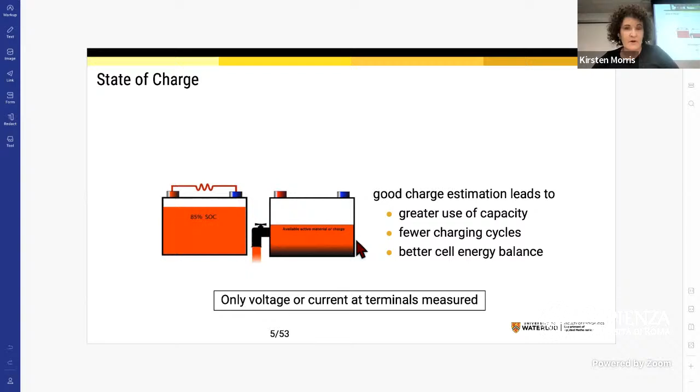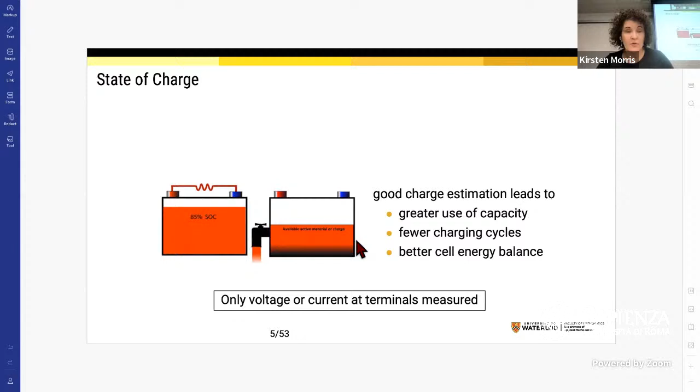There are several big challenges. One is that the models are quite complicated, and I'll show you a really standard model in a minute. And the other challenge is that from a practical point of view, all we can measure at the terminals is either the voltage or the current, and the voltage or the current is only very loosely, very weakly coupled to the actual state of charge. So it's a very challenging estimation problem for several reasons.

I'm just going to give a really brief overview. So the main variables are the electric potential and the ion concentration. And then there's a bunch of independent variables. The length along a cell, I'm just going to talk about a single cell. So the length along the cell, the location in a solid particle, which would be R, thinking of it as being spherical, and then of course time. And what it leads to is a coupled set of nonlinear partial differential equations with three independent variables. We're going to get rid of one of them.

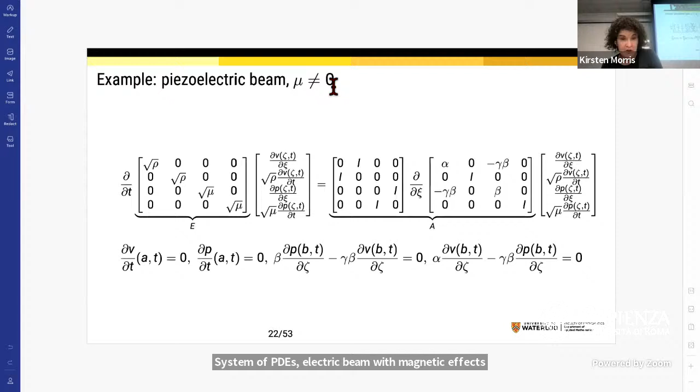So this is general. So the big extension, right, is that we've got an E operator on the left-hand side, which may or may not be bounded, and it may or may not be invertible. A couple of examples. One is, so this is not a PDAE. This is a system of PDEs, piezoelectric beam with magnetic effects. So the magnetic permeability is not 0. That's over here. So we get a system of equations.

There's an E. I mean, the E here is really not that important. It's a bunch of constants. I could have divided it out. I've got some boundary conditions. But this is fine. This is well posed. Everything works out fine. It has dynamics that don't grow with time and evolve on L2. All 4 of them are on L2.

But typically, most of these piezoelectric materials, the magnetic permeability is really, really small. So it's typically taken to 0. So this gives us what's called a quasi-static model. So one of the states becomes trivial, and I'm left with this system of 3 equations. And you can see 2 of them are basically a wave equation, okay, for V, which is the stretching of the beam. And the 3rd equation is an electrical equation for the electrical displacement. And you can see there's no time derivative on this side, so it's algebraic.

Yeah. This is actually really common, is we have a parabolic equation, some kind of diffusion type equation, maybe with some drift, coupled to an elliptic equation, and then some boundary conditions. This comes up a lot. If I took that lithium ion cell model and the electrochemical model and I linearized it, we'd end up with a system of equations that looks like that. Okay, so you have essentially kind of slow dynamics coupled to dynamics that are in equilibrium.

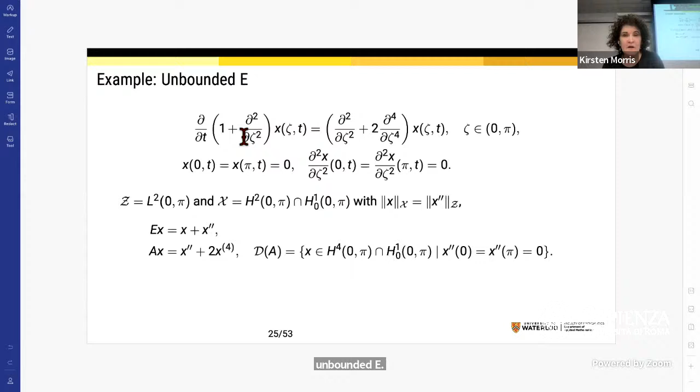And then I have an example here of an equation with an unbounded E. So you can see there's a derivative over here on the left-hand side. So this is a different example. So this wouldn't happen with DAEs, right? For DAEs, the E will be there because it's got 0 rows. You've got a non-invertible E. This kind of subtle thing only happens when you have PDEs, when you have these sort of differential operators.

So there's also some water wave models where you have an unbounded E on the left-hand side. If there was a minus here, this models soil, some kind of soil dynamics, but this actually makes it more mathematically interesting because it's no longer invertible. So I have an E that's unbounded and also with a non-trivial null space.

Okay, so back to my class of systems. So this is a class, right? So I'm restricting myself to linear systems here, but it does model a number of important situations. So the first primary questions are well-posedness, right? Do I have a solution to the equations? Is it unique? Does it depend in some sense on my initial condition? Okay, that's what it means to be well-posed.

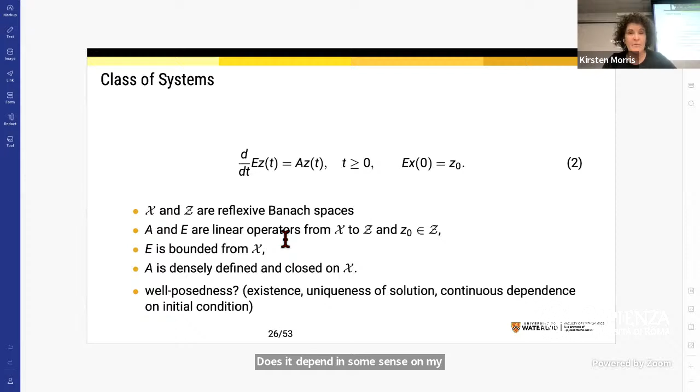So I'm going to do a little recap for a standard system. Okay, so there's an identity on the left-hand side. So z dot equals Az. So A here, this could be finite dimensions, A would be a matrix, but for PDEs, A will typically be a differential operator.

We talk about something called a strongly continuous or C0 semigroup. I typed in Hilbert space, but it could be a reflexive Banach space. A semigroup at time 0 is going to be equal to the identity. T here has got an interpretation of time, right? So at time 0, it's the identity.

It's got the semigroup property, which means if I take my state basically from time 0 to time s and then to time t, I get exactly the same answer as if I went directly from time 0 to time t plus s. So that's a semigroup property. And the third property is that it's strongly continuous: if I take S(t)z down in time with positive time, I recover z, for each z, okay?

If A generates a C0 semigroup, then A has an interpretation. It's actually the derivative of the semigroup. And the semigroup is a solution to this differential equation. If I was in finite dimensions and A was a matrix, the semigroup S is the matrix exponential. So the idea of a C0 semigroup is a direct generalization of matrix exponentials to infinite dimensional state spaces.

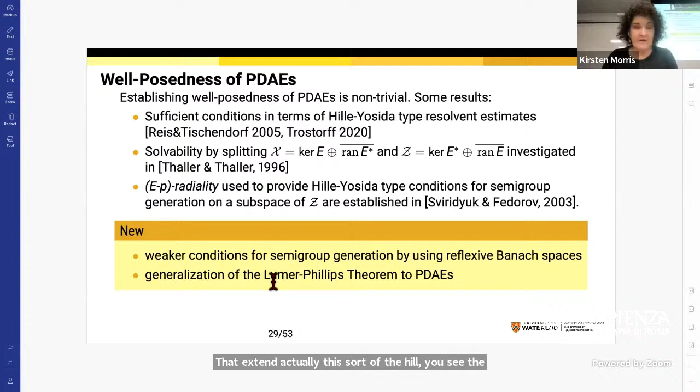So what's going on? The first part is the resolvent. My E-A resolvent is the set of all s where sE minus A has a bounded inverse. But I'm also going to define right and left E-resolvents. For the right resolvent, I multiply the resolvent on the right by E, and for the left resolvent, I multiply it on the left by E. In the original Russian book, they call this weakly radial, but I found that term confusing. So we've decided to call this the radiality index. It's a new kind of index.

So we say the system has radiality index 0 if S is in the resolvent for all positive S, and the right resolvent is bounded above by K over S, and similarly, the left resolvent is bounded above. Okay. And I'm only going to talk about radiality index 0 today, just to keep the discussion fairly simple, which for people who have worked on DAEs corresponds to roughly a differentiation index 1. Okay, we'll see this later.

But I'd like to point out that this has been extended to the resolvent in some right half plane, but also, in a more tricky way, to higher index in a paper by Mehmet Erbay and Birgit Jacob and myself that's on arXiv. Okay, so I'm only going to talk about index 0. So the big thing here is we're going to decompose the space as Thaller and Thaller did, but we're going to decompose it differently.

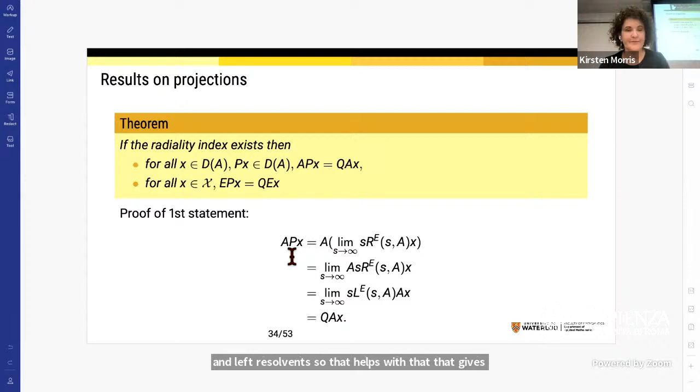So there's a sort of commuting property, and then a similar commuting property on E. EP is equal to QE. And the proof is pretty straightforward, because the projections are defined using these right and left resolvents. So that gives us the commuting. So that's the key part.

So with that splitting of the space, we define E0 to be the restriction of E to X0, similarly A0. E1 is the restriction of E to X1, similarly A1, okay? And again, because of the special way we're splitting the space, if the radiality index exists, then when we do this restriction, they're actually invariant. So A0, which is A restricted to X0, maps onto Z0, and E0 maps onto Z0, similarly E1 and X1. Not only that, the A0 part turns out to be boundedly invertible, which is going to be really helpful. Again, this is just a little bit of algebraic calculation. It follows from this commuting property.

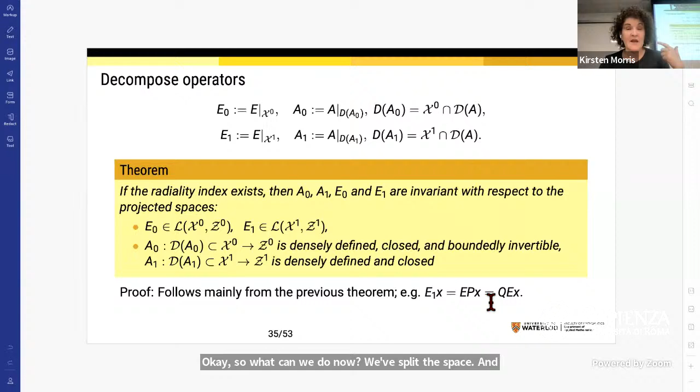Okay, so what can we do now? We've split the space, and the splitting of the space gives us a splitting of the operators, which is invariant with respect to the spaces. So it gives us what in DAEs is called a Weierstrass form. So I'm going to use the same word here. So we split the space, right? X gets split into X0 and X1, and Z gets split into Z0 and Z1 with Q. So the two together, I put tildes on them. Okay. So if the radiality index exists, and now I need another assumption: I need the range of E to be closed, which generally happens.

Then I apply these projections basically. So I apply P tilde to one side and Q tilde to the other side. And then, because of the invariance with respect to the spaces, when I write E on X0 cross X1, I get an E0 and an E1. And similarly for A, I get an A0 and an A1, okay?

Now, because I've only got radiality index 0, E0 turns out to be 0. More generally, if there was a higher index, this would be a nilpotent operator. But here it's 0. But in any case, I'm going to get E1 is invertible. So now I've rewritten the space with the decomposition. The PDAE has this really nice form.

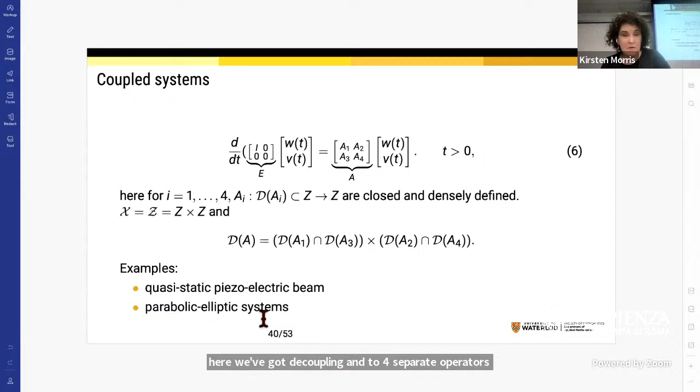Yeah, a bunch of examples that fit this. Provided that, the key thing is, I'm gonna go back here. The key assumption is that A4 here needs to be invertible, okay? If that's invertible, then everything works out really nicely.

So if A4 has a bounded inverse, and there's some nice properties with the domains, and A1 generates a semigroup, which makes sense because that's the dynamic part, it should generate a semigroup without the algebraic variables. Then we can use these results that I just showed you to say that the dynamics of the system are well posed, and they evolve on X1.

And here, the projection actually looks like this, right? So what we have is actually a variable W minus A4 inverse A3, which is identically 0. So if you redefine the state variables, you'd get one that was identically 0.

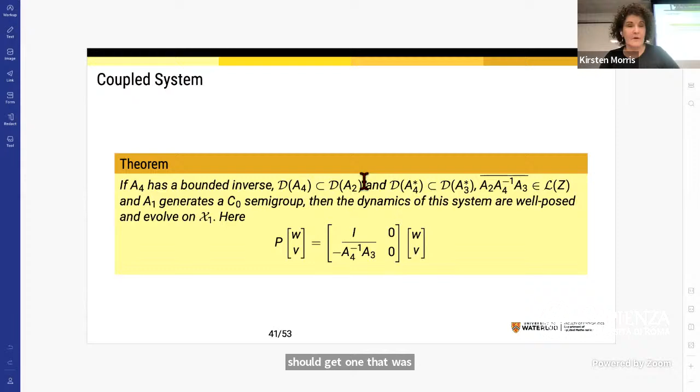Okay, so that's some recent results. How am I doing? Oh, I have a few minutes. Some recent results on systems theory. I'm going to talk really briefly a little bit about direct controller design.

Okay, so just looking at a parabolic elliptic system. So this is in one space dimension. So I have a basic diffusion equation here, and then a steady state one here. So a slow one and a fast one. And then I'm applying control at the boundary, Neumann control at the boundary.

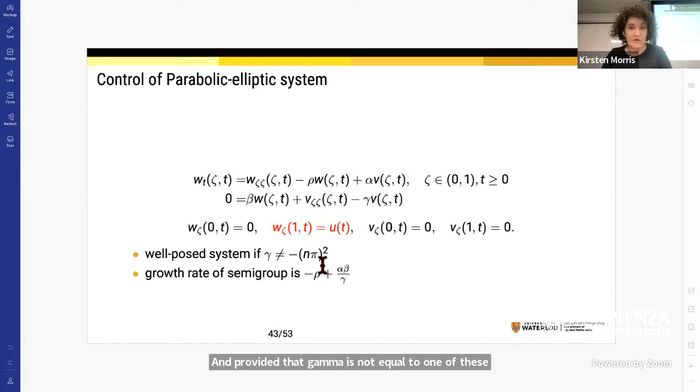And provided that gamma is not equal to one of these integer multiples of pi squared, it'll fit what I just talked about. It'll be well posed. And the growth rate of the associated semigroup is minus rho plus alpha beta over gamma. So this is interesting. When we first calculated it, I was a little bit surprised.

So this is one of the interesting things about coupling systems. This equation here, which is a diffusion equation, can be stable. Supposing this is stable, okay? So rho is 0 or positive. And then I'm coupling it to an elliptic equation, which is in equilibrium. So it's extremely stable, okay?

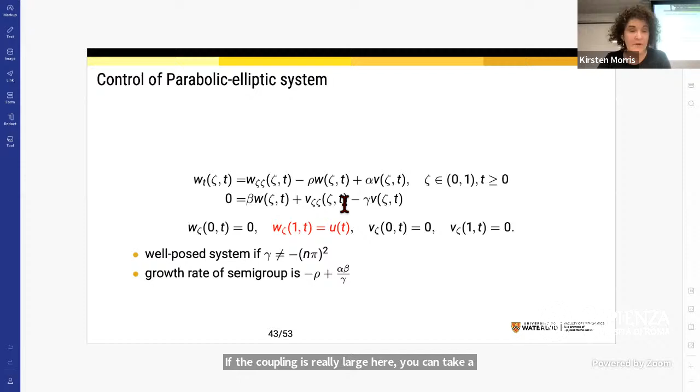But the coupling can destabilize the system, right? If the coupling is really large here, you can take a stable system and the coupling renders it unstable. So that's more motivation for studying these systems. So what Ella looked at was doing backstepping. So I'm going to do a little bit of overview on backstepping.

So what could we do here, right? We could transform the system to Weierstrass form and then find a transformation on that. But we've been trying to do procedures that we can generalize to more complicated ones. We didn't really want to do that. We wanted to study it, knowing it's well posed, but try and do the controller design without the transformation. We could find a double transformation, so do a vector-valued transformation.

We could also just try and transform only W, because I've only got one control here, right? I've got two equations and only one control. So what she looked at was, let's just do only W.

So what you do in backstepping, this is a general backstepping thing, is you define a transformation. So W tilde is my new variable, okay? And I do a Volterra transformation. And the nice thing about this Volterra is I know it's invertible. So I've got a transformation that's guaranteed invertible.

And this particular one was studied. This is the advantage of this one. We took a known transformation and tried to show that it works. The advantage is that Krstic and Smyshlyaev have already studied it. They showed that this equation had a solution. We also have an expression for the inverse. So there was a lot of groundwork that was already done. So yeah, let's try that one. That transforms it into this similar system, okay?

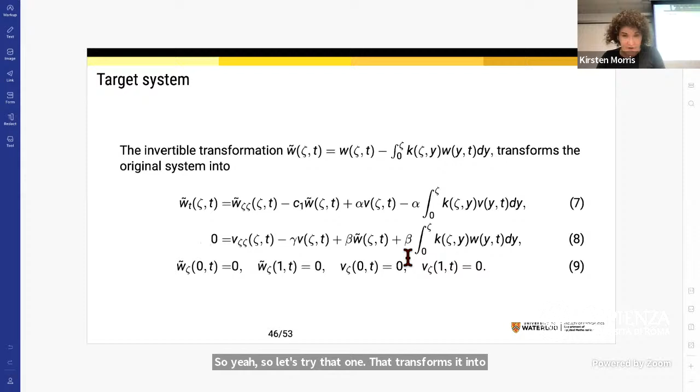And this is what happens in backstepping. So W tilde is, by definition, equal to this, W minus the integral. So then if I differentiate both sides, I get this, right? So I get an extra term because I have to differentiate the integral. And then I evaluate at 1, right? So that's what it's equal to at 1, okay?

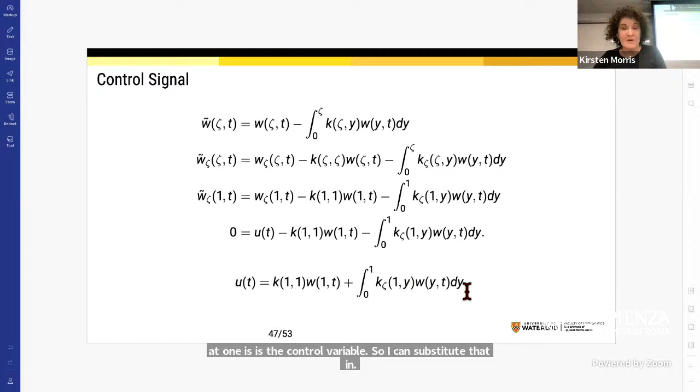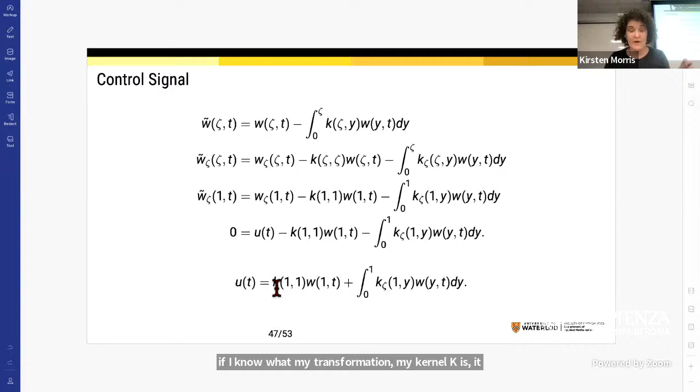But I know that for the original variable, the derivative at 1 is the control variable. So I can substitute that in. So now this tells me what the control variable is. So if I know what my transformation, my kernel K, is, it gives me an exact closed form representation for the control signal without any approximation. So that's the thing that's very attractive about backstepping.

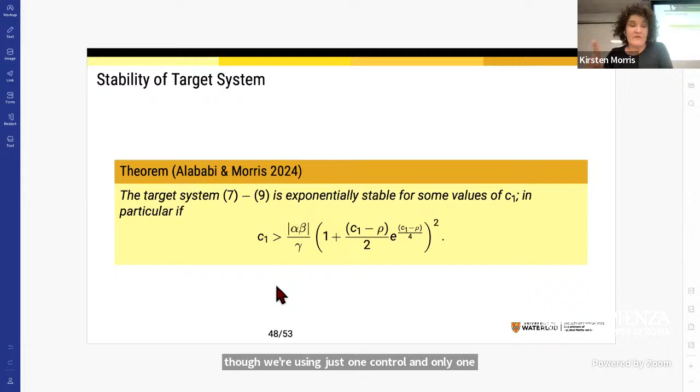So Ella showed here that in fact, even though we're using just one control and only one transformation, for certain values, it's exponentially stable. And then by analyzing it slightly differently, we got better results. So these are sufficient results. They're not tight, but they do show that there's some power to just working with the one transformation.

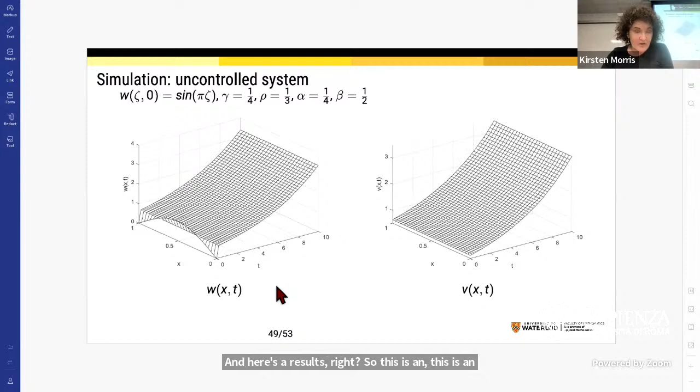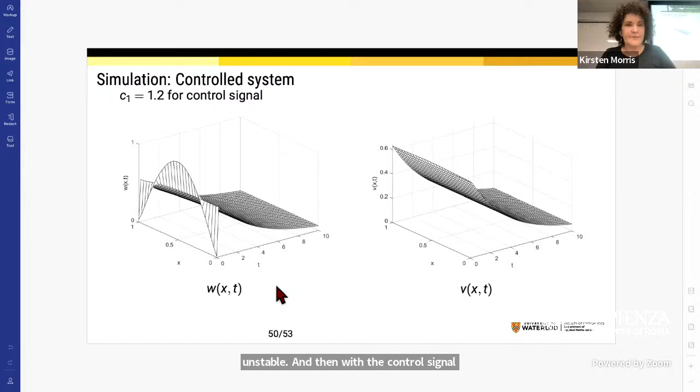And here's the results, right? So this is an unstable system. The original system was stable, but the coupled system is unstable. And then with the control signal, you can see it decays nicely to 0. Let me see the control signal. And I just got one slide on this.

We've also done, just fairly recently, looking at index 0 linear quadratic control. The only extra assumption is that the state weight decomposes. And the idea here is we want to make sure the control is consistent with the initial condition to avoid distributions due to this algebraic part. It turns out that there is an optimal one, and it can be found by solving a differential Riccati kind of an equation coupled with an algebraic equation.

And the nice thing is to solve these equations, we don't need to compute the projections. We needed the projections for the proofs. We need to know they exist, but we don't need to actually construct them to calculate a control. So that's my, I think I'm out of time.

So I'm hoping I've interested people a little bit in PDAEs. They come up in a lot of applications. We have some results that extend Hille-Yosida and also Lumer-Phillips, which I didn't talk about. But there's a lot of open questions still for well-posedness, even for linear systems, practical ways of ensuring that we have well-posedness and then what kind of bound we have on the solution. For nonlinear, it's pretty open.

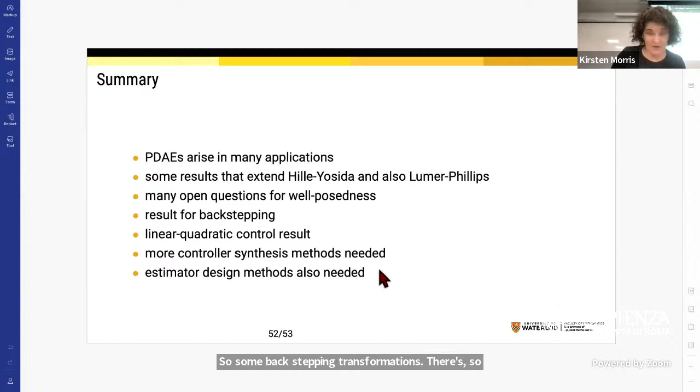We've done a little bit of work on backstepping, so some backstepping transformations. There's some linear quadratic control results. And I also like to mention that Timo Reis in Germany has also got some results using a slightly different approach and some different assumptions on linear quadratic control. But the idea here is, right, we're working directly with the PDAEs. We're not trying to convert them. But more synthesis methods are needed, and estimator design also has lots of problems. So, thank you, everybody.

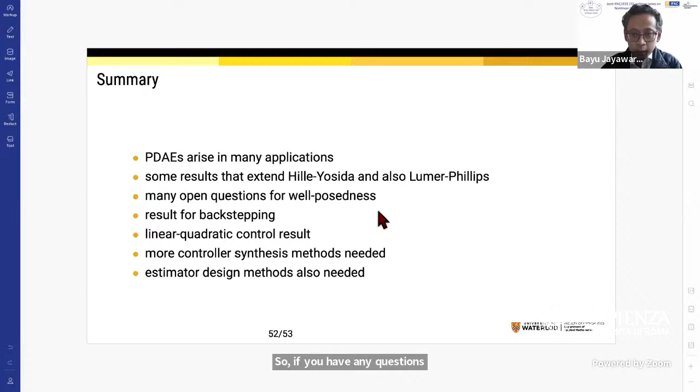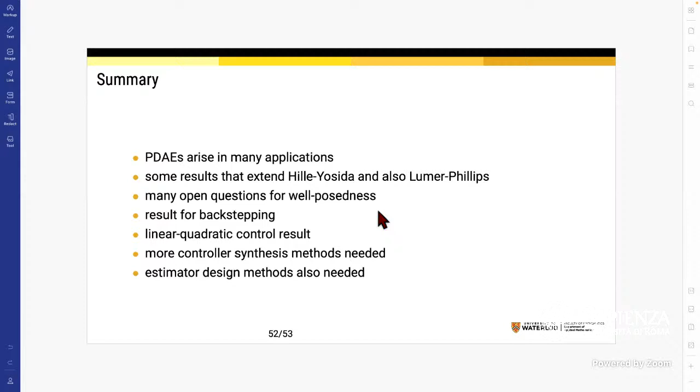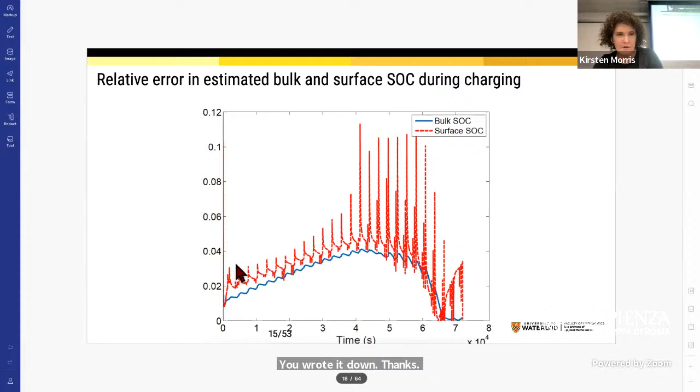I have a question. My name is Kamen Perez, and I have a question regarding the nonlinear system, the nonlinearity. You said that a necessary condition to derive your results is that the nonlinear function or operator is Fréchet differentiable. Let me go back. Should I go back to the slide? Yeah, somewhere around 20. Oh, here. The function phi. What will happen if this function is not differentiable? Let's say it's a relay function or hysteresis function.

Yeah, that's a good question. So what actually needs to be differentiable? So R, the one that you solve for, being differentiable is a consequence of the implicit function theorem. But what needs to be differentiable is the algebraic equations. There was a function phi. Yeah, so phi is the potential, R is the function we solve for.

The implicit function theorem generalizes from basic calculus on Rn up to function spaces, but you need the differentiability of the functions in the equations at the top of the page to use the implicit function theorem to solve for it. It's the same as the inverse function theorem, just a similar result. And then you get R is differentiable for free.

I think you're talking about Taylor series linearization at some point. Yeah, it's a good point. So the fact that phi is locally a function of C is exact. It's a differentiable function of C locally. You wrote it down. Thanks. So no, it's an exact result. But from a practical point of view you end up working with the linearization, which is why from a practical point of view, it's not great.

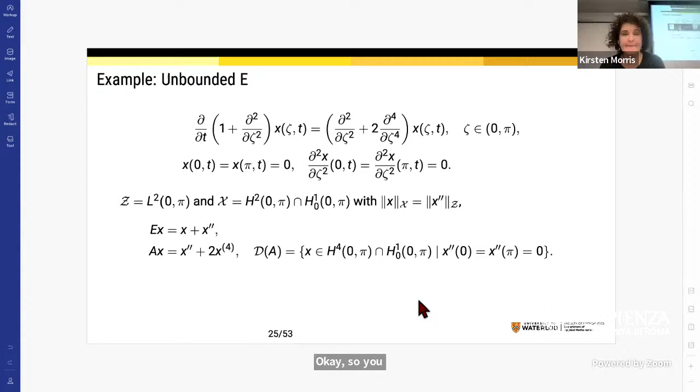Yeah, so we're looking at these, but on infinite dimensional spaces, not just on Rn. Okay, so you relate all these results to partial differential equations, right? Yeah. Okay, thanks. This is already a result from quite many decades ago. I still remember this from my PhD.